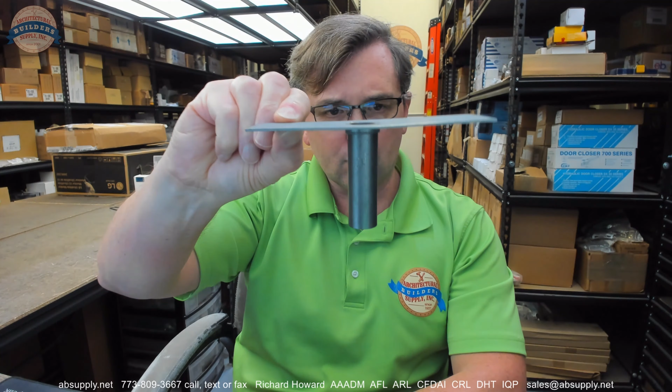This video is to bring you a closer look at the Gulfport number FR101F, what they call a masonry tube anchor. You can sure see why they would call it that. We would call this a pipe anchor.

I would probably want to call this, although a tube anchor, to me a pipe anchor connotates, quite frankly, a heavier anchor in the sense that the pipe was traditionally a little bit thicker material, as was the strap. But regardless of that, this is a pipe anchor or an existing opening anchor or a tube anchor, but pipe anchor is pretty typical terminology for this.

A pipe anchor has a lot of things happening on it that we have to be aware of. So first of all, where are you going to use it? Well, you would use this in an environment where you're going to install a frame into which, as you tighten the screws down, assuming you're dealing with a flathead or dimple or countersunk application for a 3/8 by 6 or 4 or 5 inch or whatever length sleeve anchor, or a number 24 by 6 flathead wood screw, as you tighten that anchor down, you're not going to crush the frame in.

Now, that is almost always used when you have an existing masonry opening and you're going to drill the wall. Frame will go in place. You'll mark the wall. Frame will come out, and then you'll drill your holes. Frame back in, tighten the bolts down, and as you tighten, you won't crush the frame in because this tube or pipe is preventing the soffit of the frame from being crushed in.

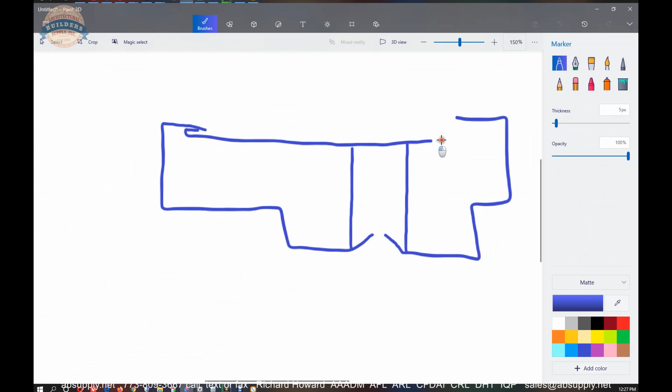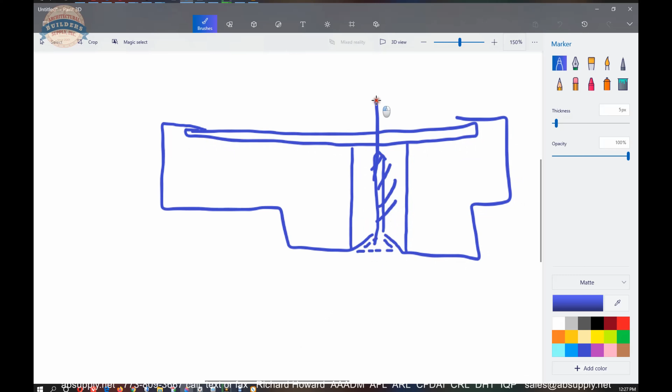Okay, that tube is going to fit underneath here. That metal strap is going to fit underneath here. Okay, and this is where your anchor head is, of course, going to sit. Well, forgive me, it'll actually, of course, protrude all the way in. But that's where that anchor is going to be fitting for us.

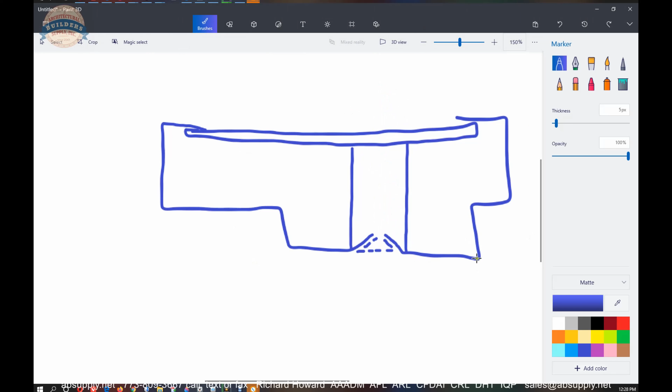Okay, and of course, again, unequal rabbet in this grotesque out-of-scale drawing, that's 1 15/16, and that's 1 9/16. That's unequal rabbet. The other way to go is to have equal rabbet where it's 1 15/16 on both sides of the frame. Very common. Now, why do some manufacturers create unequal rabbet? Well, back in the old days,

what you would very typically see is the manufacturer have the logic where, well, if you want a 1 3/4 thick door, I'm going to put it here. And if you want me to make 1 3/8 doors, I'm going to put it here, because 1 3/8 doors do exist, and they were common, or more common certainly than they are now. So as a result of that, you can see why we need to have this tube not in the center, biased towards one side when it's an unequal frame.

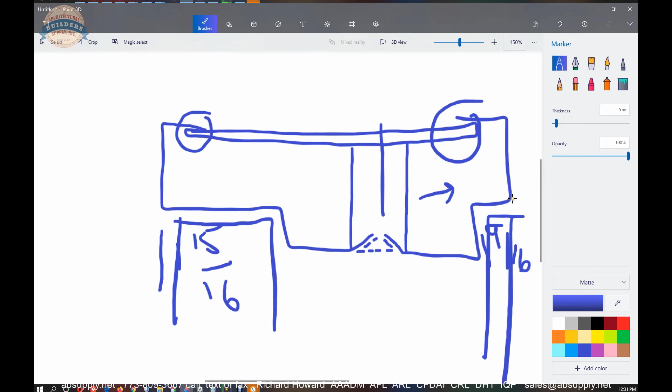Now, if you were to use this in an equal rabbet frame, what you're going to find is this portion is going to come right to the end here, and while you can make it work, it's not the right anchor. And then, of course, we are assuming that the 2-inch face profile exists and that the projection from the stop to here is 3/4. So you can see a lot goes into a pipe anchor. We have to make sure that it's correct, and that's the bottom line.

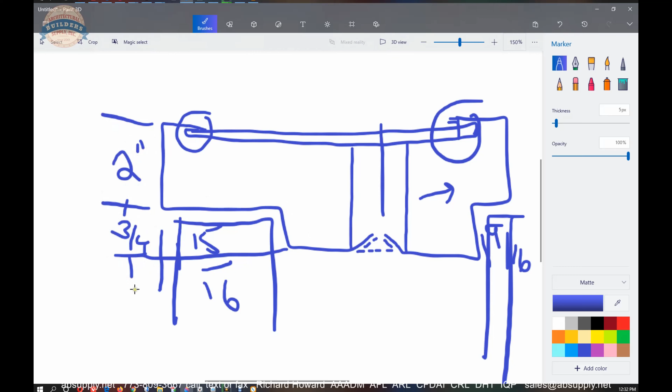How you create that dimple, you can do that on a Dake press. I think a 4-ton Dake, D-A-K-E, press would be really good for that. There was a fella in Ohio who had the die set for doing that. And that was obviously many years ago that we ordered that press. So I don't recall who that was, but you can get a die set for doing this.

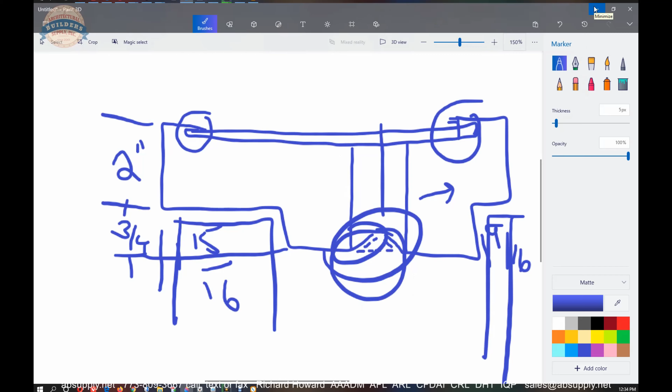It's not going to give you as clean of a finish as a tool for doing it, or a Dake press with a positive and negative, or a die set. You really want the die set to do that, because that tube is not going to really prevent over crushing of this area right in here.

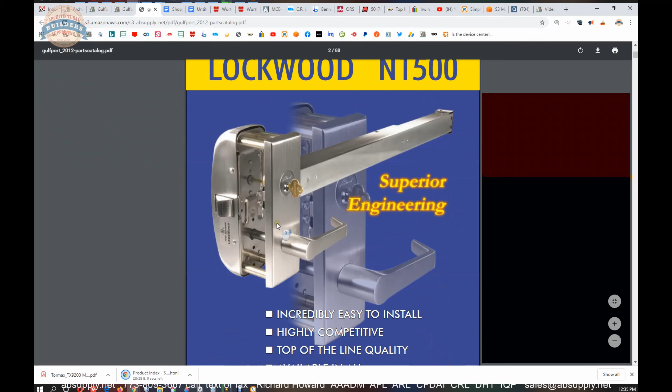Okay. The link to the manufacturer's page is awfully handy, because that will allow us to pull up not only all of the Gulfport products that we sell, but also a link to the manufacturer's website, as well as a link to the parts catalog. Now, the parts catalog is handy because it will allow us to review the FR101F, which is here, for 5 3/4 frames. They don't tell you it's unequal rabbet, but I'm telling you it is.

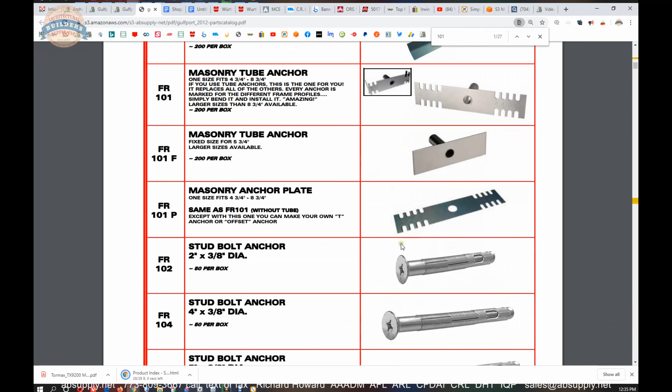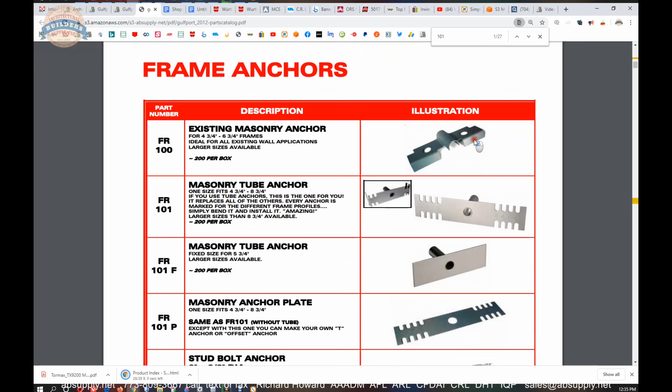They also have variations on these. You can get this for adjustable sizes, meaning if you want to have some to do bigger frames, or if you wanted to have some to do equal rabbet, you could use these as well. Okay. Existing masonry anchors, sometimes these are called butterfly anchors because they can literally be bent in a downward fashion. Lots of different anchors are included here. T-anchors, stud anchors, Z-anchors, wire anchors, yoke and strap anchors, base anchors, floor anchors, etc.

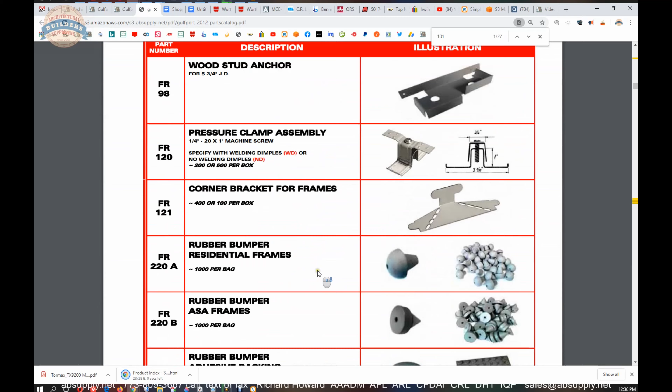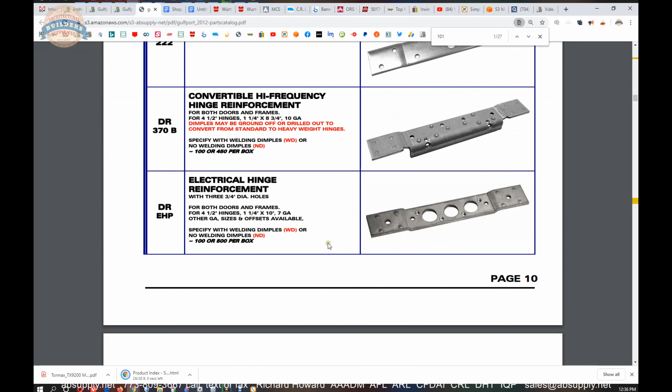I would very much recommend that you review this catalog because the name Gulfport is quite synonymous with accessories for hollow metal door and frame manufacturing. And if you are a manufacturer or a distributor, or you're a field tech, you're a locksmith, someone who does installation of hardware or reworking of doors and frames, there's absolutely going to be material in here that you'll want to be familiar with. Let's wrap up this video on camera.

Now, the upside of this anchor is that, well, when you put the frames into the truck and you drive to the job site and unload the frames with the contractor, and then you leave and drive an hour to the next stop, there's no chance that you forgot the anchors because they're welded to the frame. Wire anchors, T-anchors, metal stud anchors, wood stud anchors, those can be forgotten. You walk out to the dock and why is that box sitting there?

It's full of anchors. Oh my gosh, the driver forgot to take the anchors, or more likely the people loading the truck forgot to load them. So I like them for that reason. You can't forget them. And also, number 2, they're very effective. They will not crush the frame, and will give you the ability to really tighten that anchor. The downside of pipe anchors is that they're more expensive than other anchors.

And in that Gulfport catalog, you will find the FR690 or the FR691, which is simply a less expensive version of this type of anchor. It's not necessarily going to as well prevent you from crushing the frame, but it will be less expensive. So you might want to review that. The name Gulfport, again, is synonymous with this type of material.